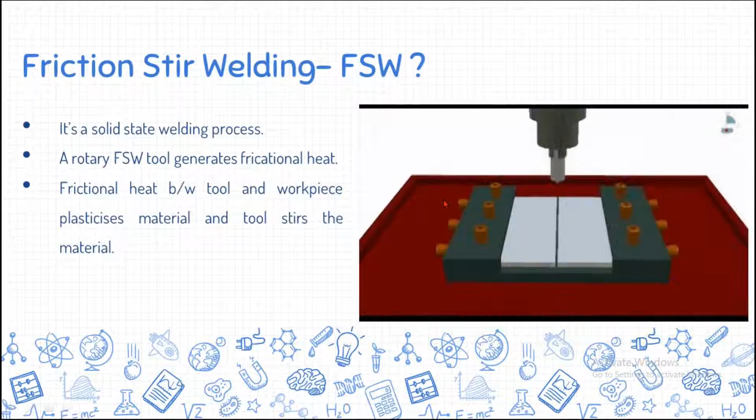So this rotary tool plunges into the workpiece and traverses along the welding line, thereby the heat plasticizes this material, and this stirring rotating action mixes this plate and this plate together, and during solidification, during the cooling time, the welding occurs. That is what happens in this particular process.

For understanding, you can simply categorize this process in 4 steps. The first one is rigidly clamping the workpieces and aligning the tool at the center of the weld line, and plunging the tool into the workpiece is the second step. Once it completely plunges, for around 25 to 30 seconds, until the required heat is generated in the workpiece, we keep it at the same place.

Once the required temperature is produced, we move this tool along the weld line. This is the traversing step, the third step. Once it reaches the end point, tool removal is the fourth step in the friction stir welding process.

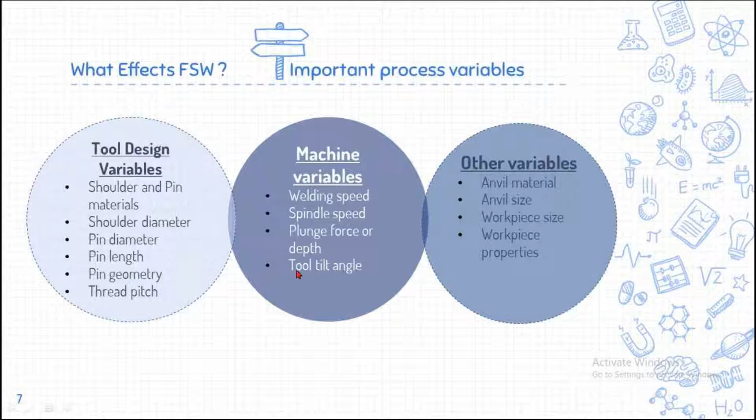And coming to the other variables like anvil material, in practical application we will keep some other material as a backing plate or anvil. That anvil material will absorb some heat from the weld plates. So the anvil material also will influence this process. Size of the anvil or backing plate, workpiece size and thickness will influence this process. Workpiece properties also will greatly influence this process. If one wants to do research on this friction stir welding process, we should thoroughly consider all these process variables in friction stir welding.

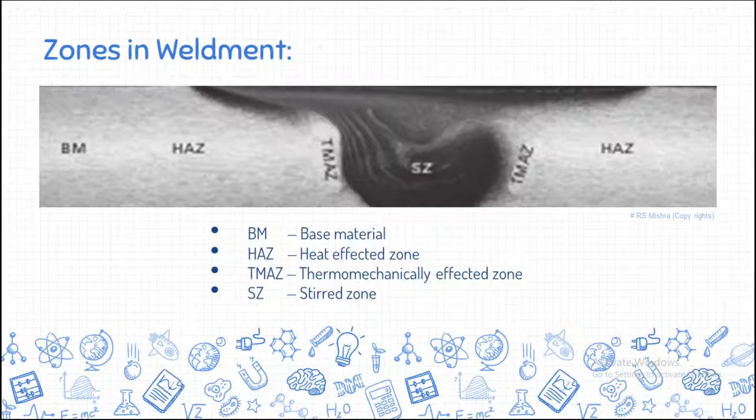Just away from the stir zone, the thermomechanically affected zone. Why is it called that? This area is subjected to both thermal and mechanical effects. That's why it's the thermomechanically affected zone. Somewhat further from the center of the weld, HAZ, that means heat affected zone. Only heat is affecting the material, but no mechanical effect on this particular zone. BM means the base material, nothing influenced here, the unaffected zone. So there are four zones we can categorize in the weldment in friction stir welding.

Coming to the advantages and some disadvantages of this process. We can say friction stir welding is a green welding technique. Unlike conventional welding techniques, it doesn't give any toxic or harmful gases or fumes. So it is a green welding process. One can get good mechanical properties in this weldment, and this process can be easily automated on a simple vertical milling machine or any CNC machine.

In conventional welding techniques, with a consumable tool, we always need to change the electrode every time. But here in FSW, the tool is not consumable. Around hundreds of meters of welding length you can weld using a single tool. That's an advantage of this process. As I told, toxic fumes are absent, and there will be very less distortion, we can say almost zero distortion, and no porosity is observed in the weld zone.

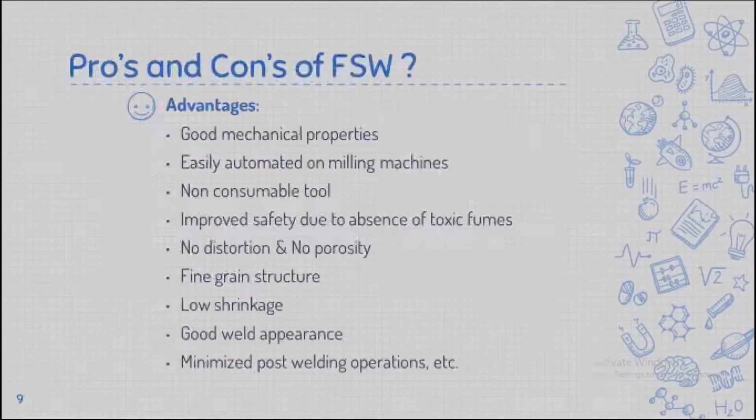But here very minimal post-welding operations are to be done on the weldments. Some disadvantages are also there in the friction stir welding process: when you remove the tool after completion of the weld, there will be a small keyhole left over in the workpiece. That is one disadvantage. And here to hold the workpieces, we need more forces. Clamping is somewhat difficult in this process. We can say it is a disadvantage.

And in some cases tool wear, in some cases tool breakage may take place due to vibration of the machines and other effects. That can be considered a disadvantage. And coming to the applications, this process has been considered in many industrial applications like automotive, shipbuilding and marine industry, aerospace industry, railway industry, and some other engineering industrial sectors.

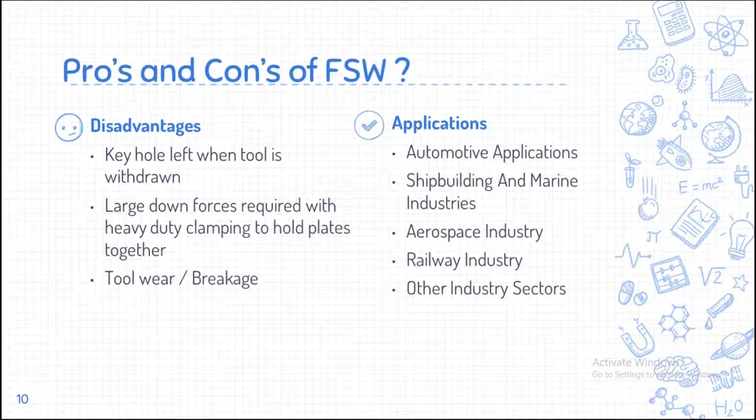Why only friction stir welding? Why not other welding processes? Here, this process is particularly considered for non-ferrous materials like aluminum alloys. These aluminum alloys can also be welded using conventional welding techniques like MIG welding, gas tungsten arc welding or TIG welding. These processes are alternatives to weld these aluminum alloys. But using these conventional welding techniques, the aluminum plates will be melted to weld.

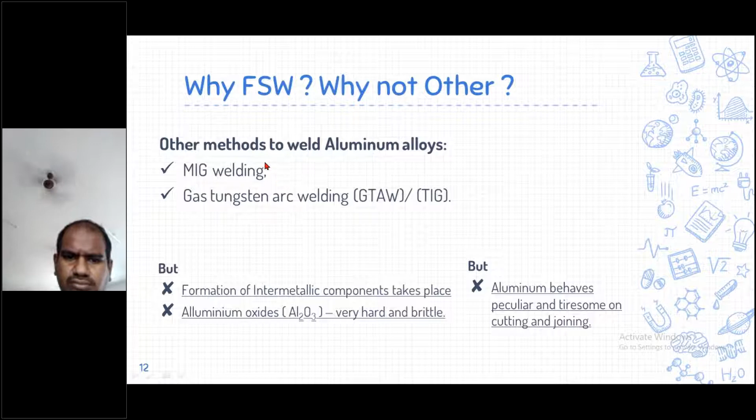These high temperatures and the melting of the aluminum will create oxides, for example aluminum oxide Al2O3 formation takes place using these welding techniques. Al2O3 is a very hard and brittle material. If these oxides form in the center of the weld, when the plate is subjected to forces or loads, it may suddenly fail. So these oxides are not preferable. The aluminum melting point is around 660 degrees centigrade, while the Al2O3 melting point is more than 2000 degrees centigrade. So this is not a good thing in conventional welding techniques.

And aluminum is a typical material which is always subject to oxide formation. So while cutting and joining aluminum, people face some difficulties. All these difficulties, like formation of aluminum oxides or intermetallic compounds using conventional techniques, can be avoided by the friction stir welding process.

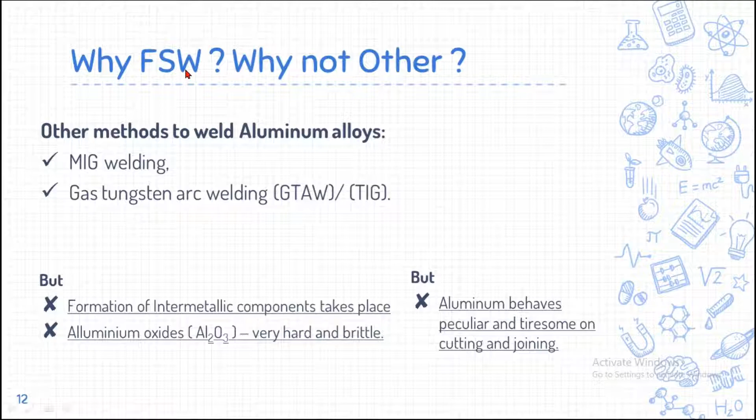Coming to the second topic, simulation. Simulating a process is always preferable in my view. Before doing any experiments, with the help of simulation we can easily find out the various combinations of parameters to weld any particular material or size. For each thickness of plate to be welded, these parameters change. We cannot always go for trial experiments. With simulation, you can change the parameters every time, say from a 3 mm plate to a 6 mm plate, and obtain possible process parameters useful for experiments. So simulation is always the best option before experiments.

In this simulation, we will see two cases: transient thermal analysis of friction stir welding on similar aluminum alloys, and on dissimilar copper to aluminum alloy welding. Before going to the simulation, a point to be remembered: many scientific journals reported that to get a good weld in friction stir welding, one should obtain around 75 to 85 percent of the melting point of that alloy. For example, aluminum melts at 660 degrees centigrade, so one should have a temperature or heat input around 75 percent of that melting point.

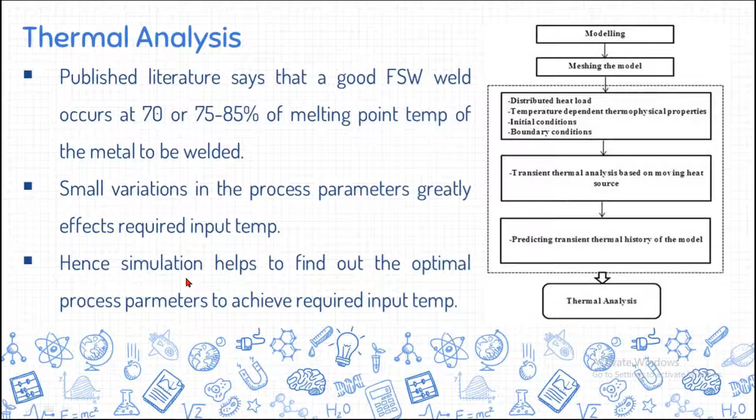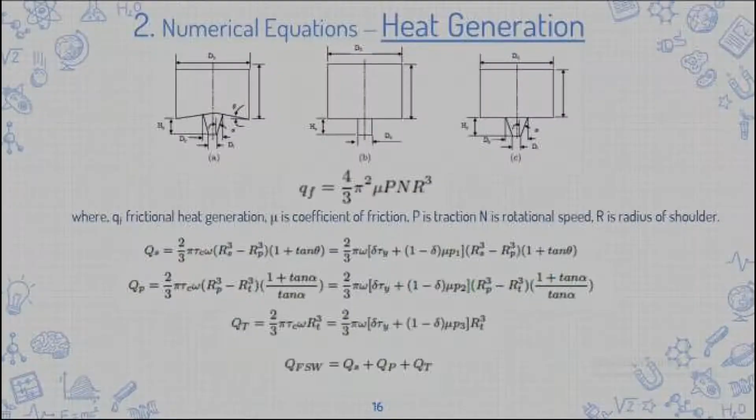For the tool pin, this is the equation, and for the tip of the friction stir welding tool, this is the equation to find the amount of heat generated over these regions. The sum of Qs, Qp, and Qt — shoulder, pin, and tip of the tool pin — will give the total heat generated in the friction stir welding process. These equations should be incorporated in the input value.

Coming to case one, we will discuss three cases in the simulation part: the effect of tool pin geometries — that is, the shape of the tool pin — on friction stir welding; the effect of increasing and decreasing tool shoulder diameter from a thermal point of view; and the effect of plunging force on the friction stir welding process.

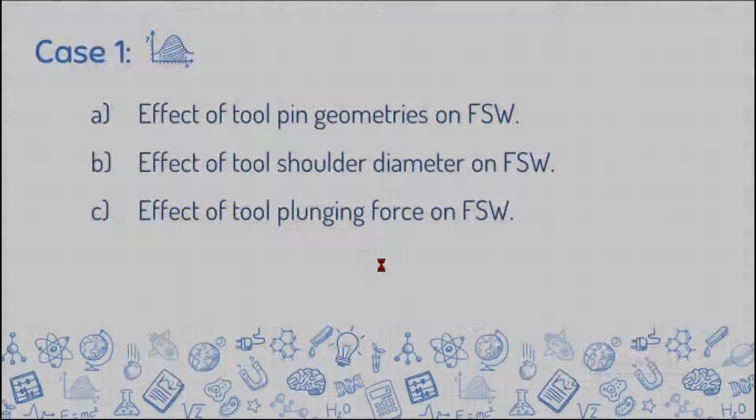Case one, effect of tool pin geometries, meaning the shape of the tool pin. We considered two shapes: a simple cylindrical pin and a tapered pin, with diameter 6 millimeter and length about 5.8 millimeters. We considered these two geometries for generation of heat, keeping properties like rotation speed and welding speed constant. We observed peak temperature distribution for straight cylinder tool and taper cylinder tool around 540 and 528 degrees centigrade. Almost both tools give very close peak temperature when keeping all other parameters constant. This is the effect of tool pin shape on temperature.

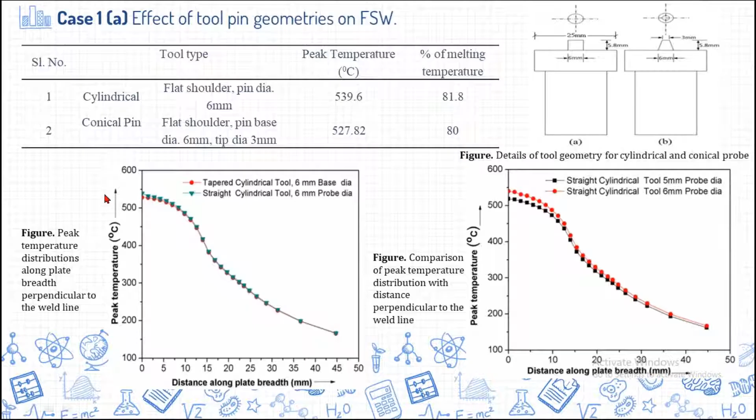Case 2, effect of tool shoulder diameter. We considered from 12 millimeter to 24 millimeter tool shoulder diameter and observed what kind of temperature variations are obtained using this range. For example, 12 millimeter tool shoulder diameter gives maximum temperature at the center of the weld around 399-400 degrees centigrade, and for 24 millimeter shoulder diameter, maximum temperature at the center of welding is around 561 degrees centigrade, which is within 82% of melting point temperature. So for welding 6 millimeter thickness plate, one should have more than 20 millimeter shoulder diameter as the best value for FSW of pure aluminum alloy.

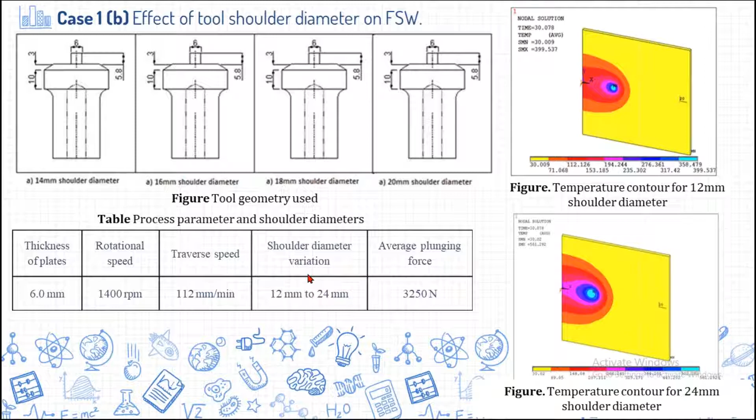We tabulated all these values on graphs, like heat distribution at the center of the welding for 12mm, 14mm, up till 24mm. This shows the maximum temperatures obtained at the center of the welding, and this plot shows temperatures about 16 millimeters away from the center for all the different tool shoulder diameters.

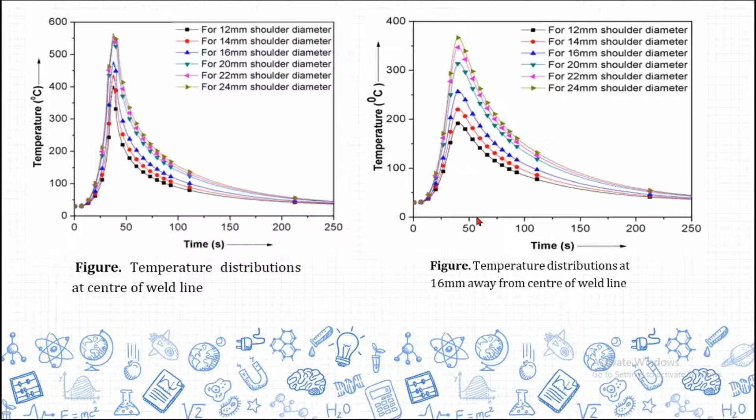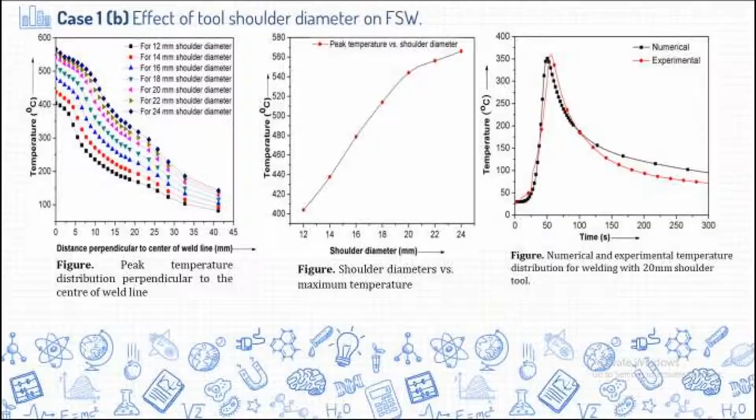The third case: after seeing this peak temperature, we did some experimental comparison with the numerical results. We observed almost less than 5% error between numerical and experimental, very close with the experimental result observed here.

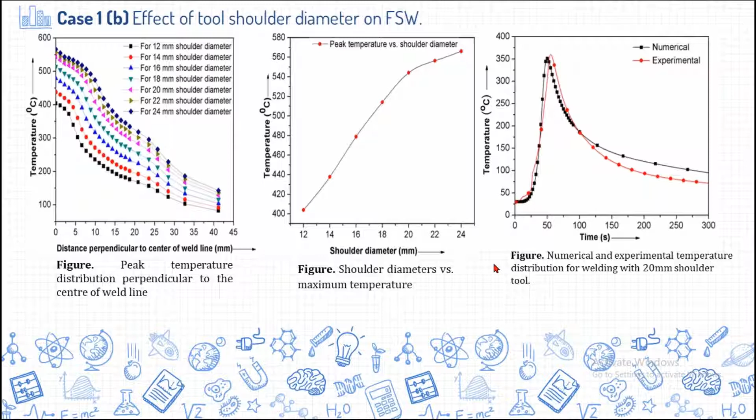The third case is plunging force. We varied from 2000 to 3250 newtons force of the tool on the workpiece and observed what kind of peak temperature variation results.

Hello? Sir, you're audible, sir, you can continue. Okay sir, thank you, there was a pop-up message saying connection is lost.

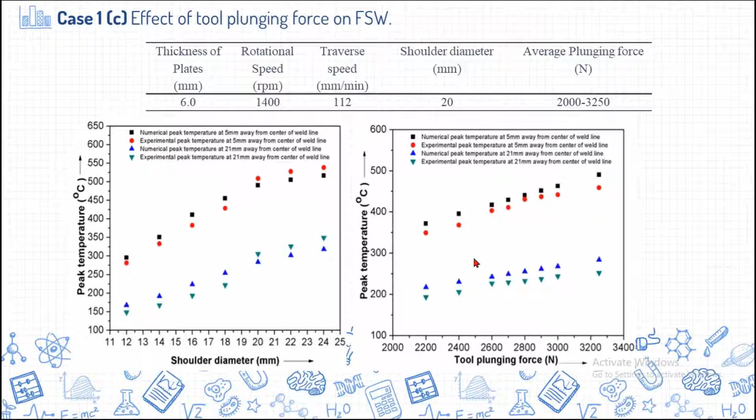So, various plunging forces: by increasing plunging force, we obtain peak temperature around 450 to 500 degrees in this range. With more than 3000 to 4000 Newton force, one can get around 75 to 85 percent of the melting point temperature of that particular plate to be welded.

So in this simulation case study, case one speaks about similar aluminum alloys, but case two, transient thermal analysis of friction stir welding on dissimilar aluminum and copper alloys, will be seen over here.

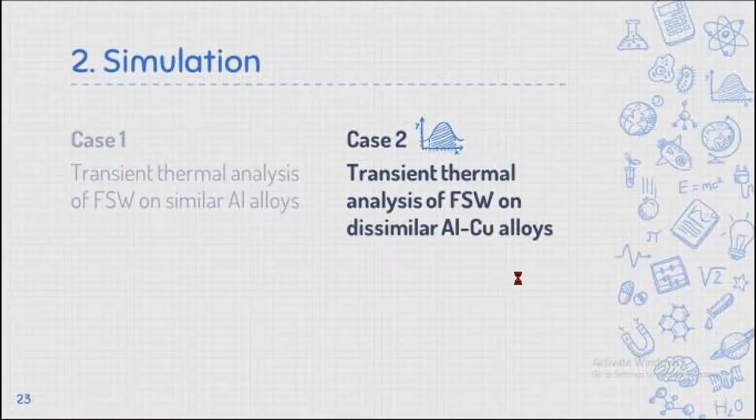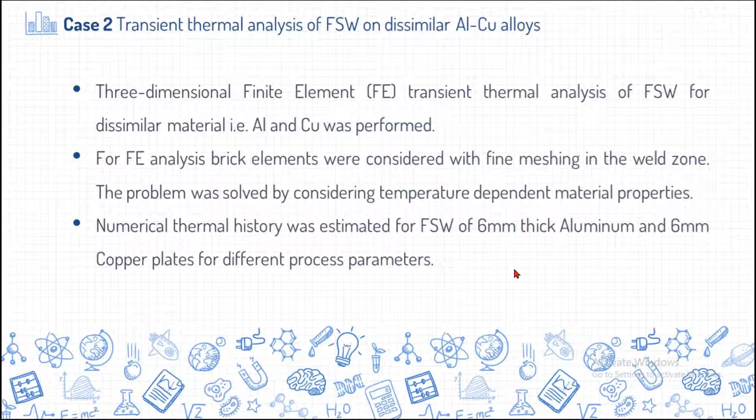Transient thermal analysis, this 3D FE analysis, was performed on dissimilar aluminum and copper, using brick elements with fine meshing at the center of the welding and gradually incremental meshing away from the center. We applied the same technique previously explained for giving initial and final boundary conditions. We followed the same procedure for similar aluminum alloys as well.

So we weld like this in this simulation: the bottom plate is a copper plate and the top plate is an aluminum plate. We kept some offset of the tool, meaning more portion, almost 2/3 of the area of the tool pin, concentrated on the aluminum side, and only 1/3 of the area concentrated on the copper side.

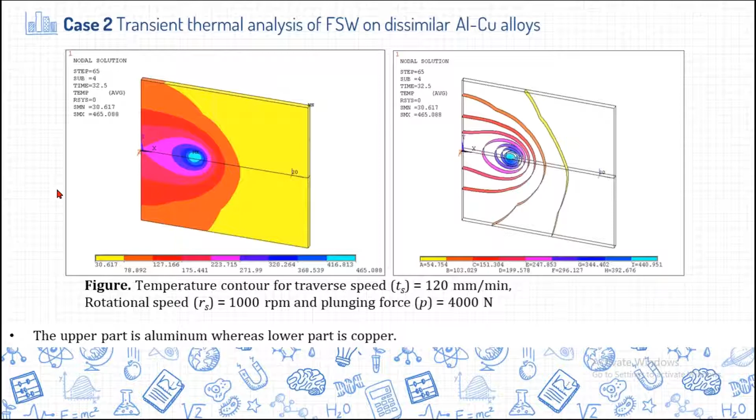We observed the temperature for these process parameters: 120 millimeter per minute welding speed, 4000 Newton plunging force, and 1000 rpm. We got around 465 degrees centigrade, which is within range. This is the thermal contour from the simulation.

This is a simulation from a side view, showing thickness from a thickness point of view, copper side and aluminum side. This much portion is the center of the line. Actually, I need to keep this line out here. This is the center of the line, and this portion is on the copper and the tool pin, and the entire area is on the aluminum side.

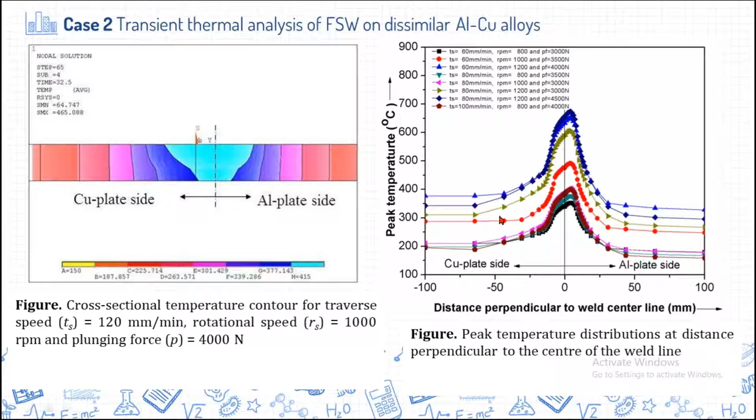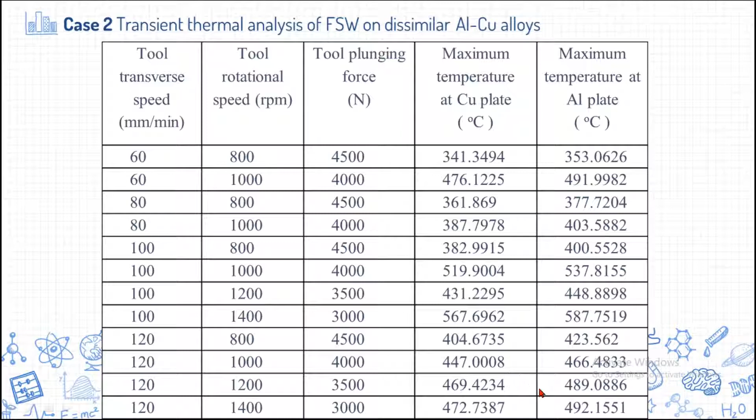Around 415 degrees centigrade was observed. These temperature values from the center to away from the center of the welding were plotted on a graph for all the different process parameters, like 60 mm per minute, 800 rpm, 3000 Newton. We varied all these process parameters and plotted them on a graph. These are the various values for maximum temperature near the copper plate and maximum temperature at the aluminum side, and these are the various process parameters. Around these parameters give a good temperature to get a good quality weld.

The next topic of this presentation is the experimentation of the friction stir welding process. Whatever we observed in the simulation, we tried to replicate with some experiments. Here we will discuss three cases.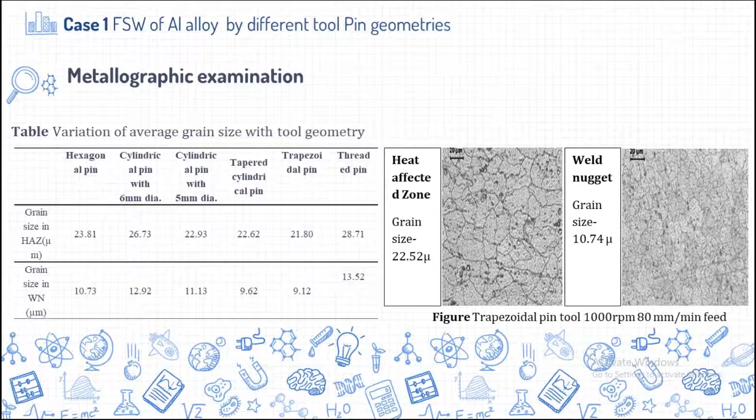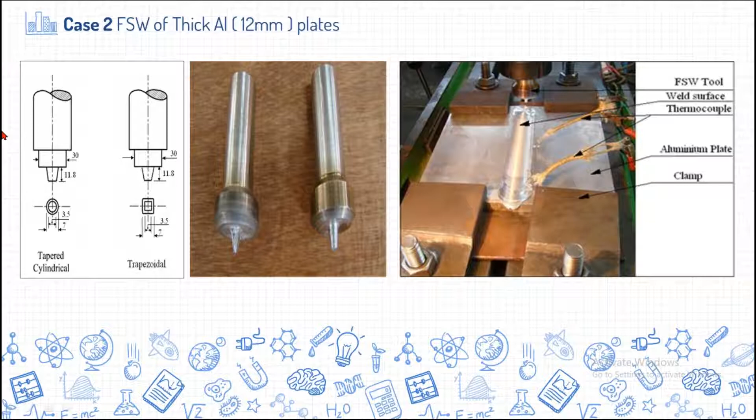So we took around 12 millimeter thick aluminum plates, greater thickness. We tested the same tools: tapered cylindrical, tapered pin, and trapezoidal pin. We fabricated some tools and tested them for high thickness welding plates. This is the setup of the welding plate. We performed welding on these thicker plates here at IIT Kharagpur.

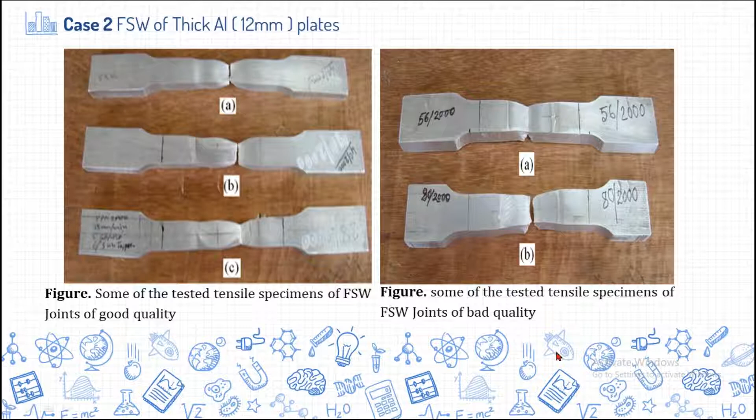And these are the tensile testing samples. Some good welding was obtained - the failure takes place just away from the center of the welding here. So some good quality weld joints, and some bad quality welded joints which failed at the center of the weld zone, for parameters like 56 welding speed and 2000 RPM, and 80 and 2000 RPM. Some bad quality welded joints were observed here.

The same values we plotted in graphs here. If you see these two values, the sky blue and green color graphs are the values for the bad quality welds. The rest show good results. This is the base plate - the stress strain curve is like this, and for the other welded joints, results are almost equivalent to the base plate, as observed here.

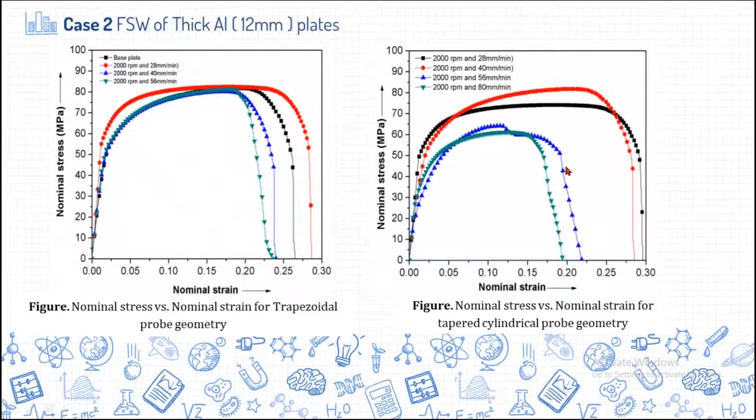So we want to see what happened, what is the reason for this failure at the center. We wanted to see, so we did some microstructural examination using a microscope. Here we observed some defects in the center of the welding over here. We expected this kind of throughout hole is because of improper mixing of material on both the sides, and there is a wormhole

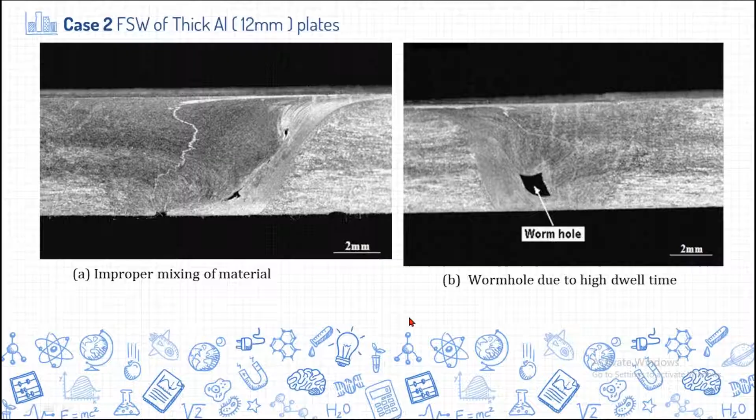defect. Many researchers also reported this kind of wormhole defect in FSW process. The possible reason for the wormhole defect could be the high dwell time; more dwell time is the reason for the wormhole defect over here. And for the same things, we wanted to see the microstructural study, how the grain refinement or grain boundaries change in different weld zones, performed for this high thickness.

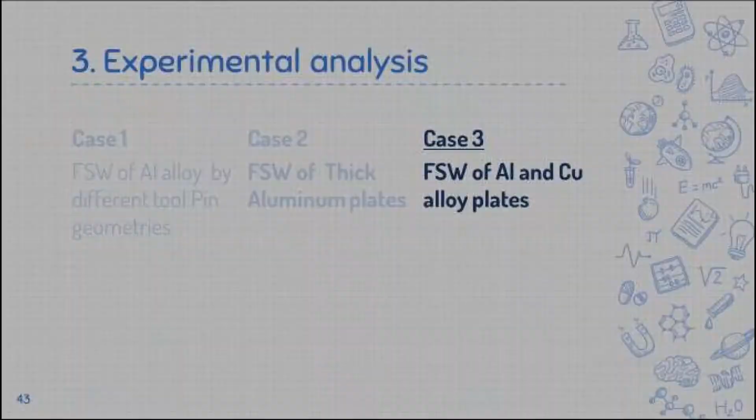The other case, like case 3, friction stir welding of aluminum and copper alloy plates were performed experimentally and compared with the numerical results also. So here in this particular case, we consider two tool geometries. There are threaded tool geometries and the shoulder diameter. We kept a bigger shoulder diameter, around 35 millimeters, and the pin diameter is around 6 millimeters. And this is the left hand thread and the right hand thread tools.

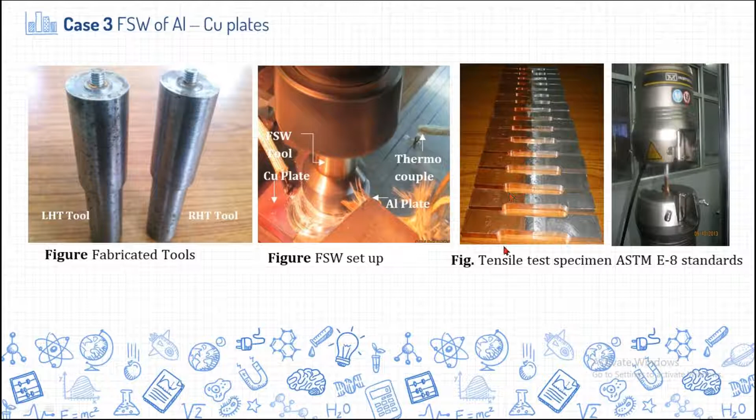So these threaded tools: as this copper material is comparatively harder than this aluminum, we wanted to have a threaded tool so that mixing takes place in a good way, and we conducted the samples. These are the thermocouples. We wanted to record the temperature obtained from the weld plates. So inserting a thermocouple and connecting to the data logger, we recorded the temperature obtained by using this friction stir welding process. These are the various tensile samples after conducting friction stir welding.

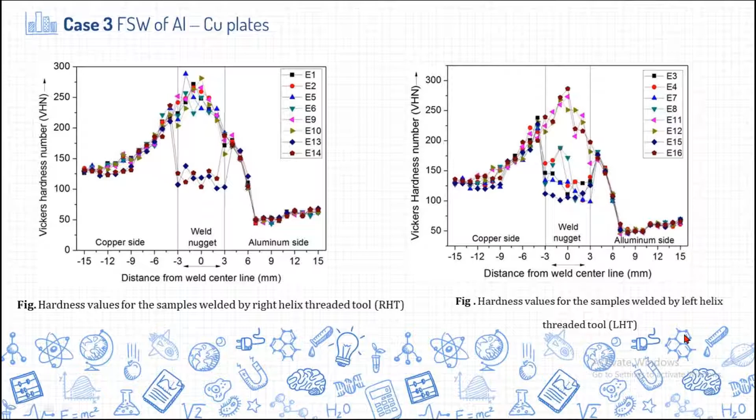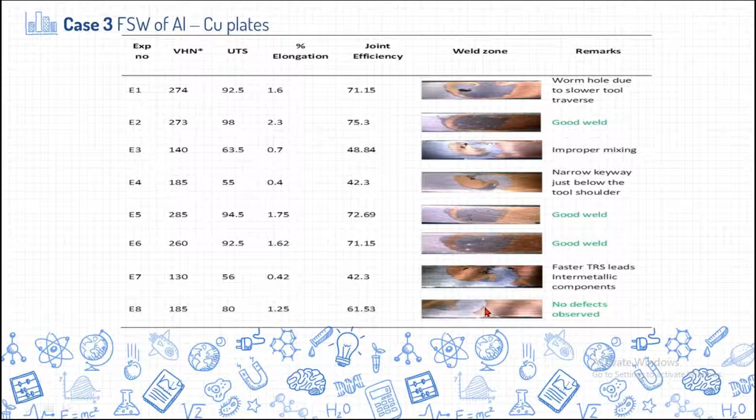We cut the same pieces from the particular experiments and did optical evaluation, like experiment 1. There is a wormhole defect due to slower tool traverse speed, and good welding for experiment number 2 parameters. See, the ultimate tensile strength, UTS, is also good, and good quality welding obtained. Some other defects observed over here, and the tensile strength is also less here. And these are all good weldings and no defects observed over here.

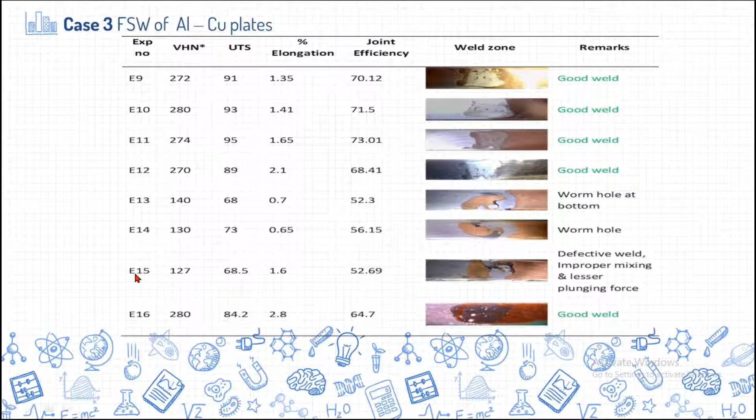For other experiments number 9 to 16, good weld, good weld, good weld. All these are good welds, and if you compare with the strength, strength is also more, and welding also looking somewhat good over here. And we did some metallographic examination for copper and aluminum friction stir weld zone. So different zones: this is a nugget zone, thermomechanically affected zone, heat affected zone, and base materials on both the sides, called aluminum side and copper side.

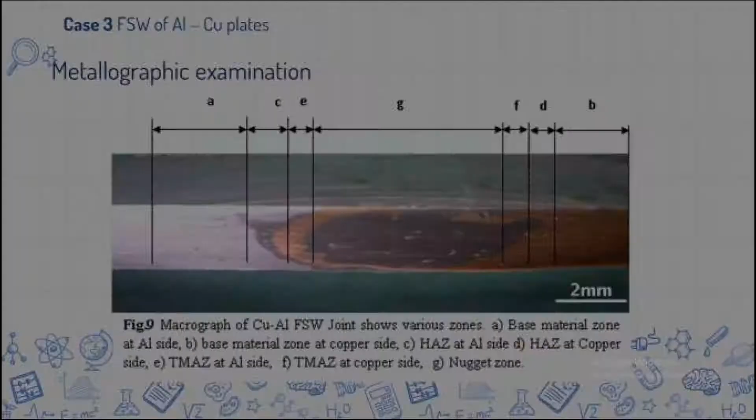And at some portions we observed some pieces of copper transferred towards the aluminum side. We wanted to see what these things are, and it looks like this, and we wanted to confirm whether it is 100% copper or a mixture. It's a mixture of copper and aluminum. We did some further examination using FESEM here.

This is a sample around this region. At this particular region, this is the sample view, and we have selected some elements like aluminum, copper, oxygen, nitrogen, carbon, etc. This is what it is showing. The yellow portion reflects aluminum, and this pink color reflects copper material. So here we cannot identify exactly where the aluminum is.

So we unhighlighted all the things and only selected the aluminum element over here. This yellow portion is completely aluminum, whereas the black portion we don't know what it is. Then in the next step, we unhighlighted the aluminum and only highlighted the copper, which is pink. So then we observed copper is there over here.

So leave aside these portions, and if you observe outside of this one, both aluminum and copper are homogeneously mixed throughout the entire weld zone. But here there is a higher percentage of copper, still some black spots are there. That means maybe some aluminum is also there, but we wanted to see how much percentage of copper and how much percentage of aluminum is at the same places.

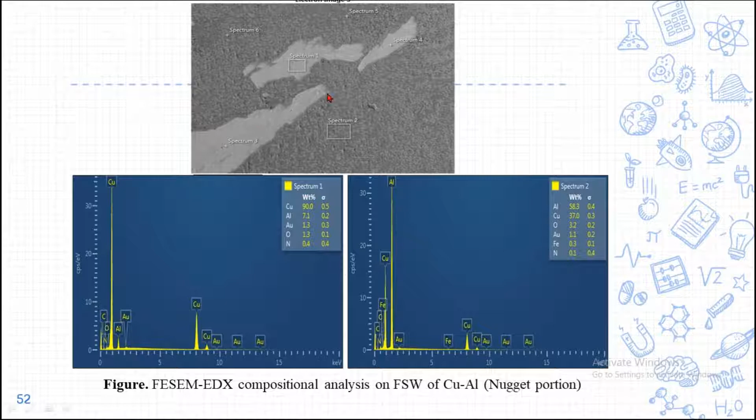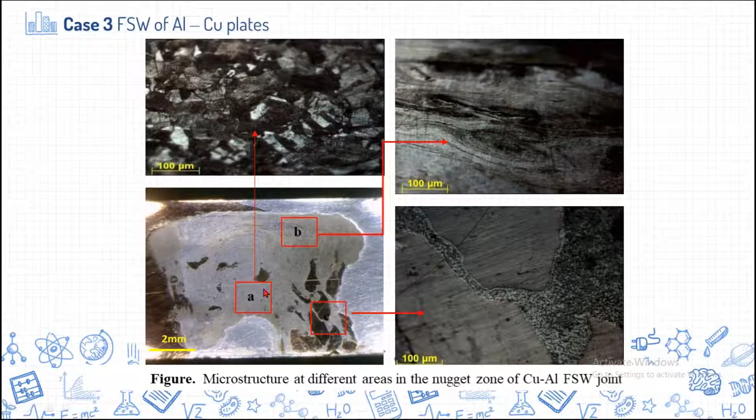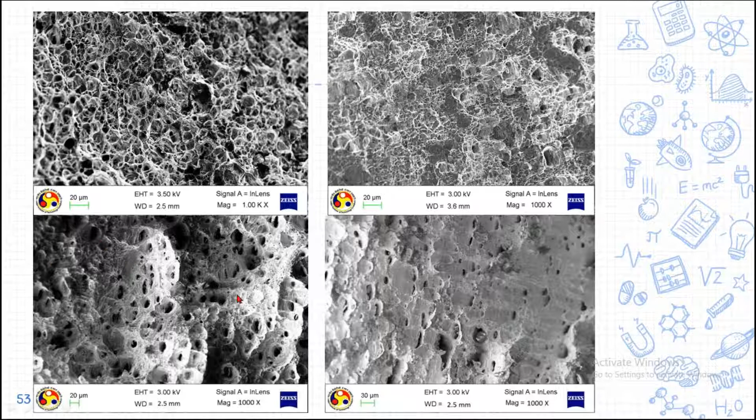This is what we see: though some hard pieces are transferred to the aluminum side, if you neglect these particular parts, in the rest of the area homogeneous mixing of aluminum and copper takes place in this particular study. This kind of study can be performed for different materials by upcoming researchers.

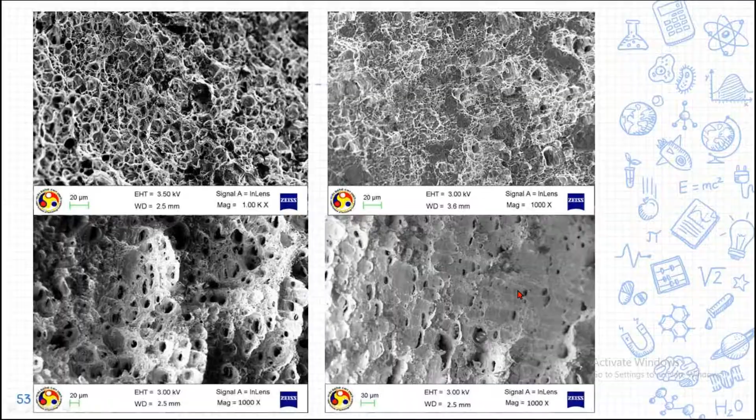This is a fractography study after a tensile test, wherever the failure takes place. This is the pure aluminum fractograph and the copper side fractograph. You see these cavities and peaks and valleys, which show that ductile failure takes place at the weld on the aluminum side, and somewhat brittle failure takes place towards the copper side. And this is about the experimental analysis.

The next topic is research challenges. What other things can be performed by those who want to come and work in this particular area? Some unsolved challenges in friction stir welding. In friction stir, you have other processes like friction stir processing, friction welding, friction stir joining, and friction stir spot welding techniques.

In friction stir welding, very few publications have reported on welding of low carbon steels and mild steels using the friction stir welding process. And friction stir welding of dissimilar thickness sheets, say 5 mm and 6 mm, or 6 mm and 7 mm, also has very few publications reported till now. Maybe these can be taken as challenges.

And tool modifications: what kind of tool is best for welding of steels and other ferrous metals. Tool modification is another challenge in the friction stir welding process. And coming to friction stir spot welding, the tool will not be moved, just like resistance spot welding. In the friction stir spot welding technique, the tool will not be traversed after plunging.

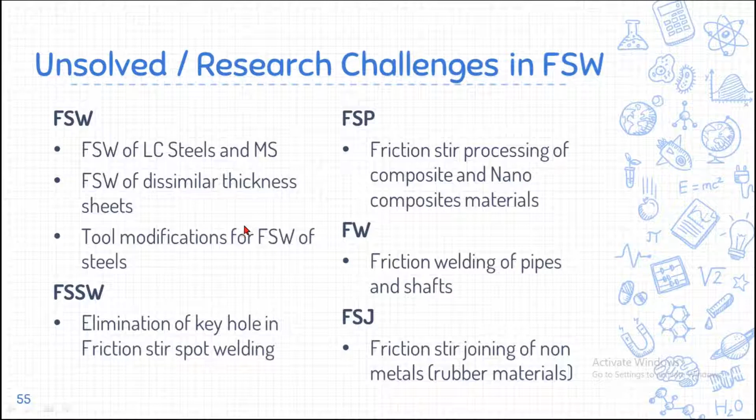Non-metals, whatever we make using 3D printing, can be joined by using friction stir joining process. This is another research challenge, like synthetic materials or rubber materials, like 3D printed materials, can be joined using friction stir joining process. So these are the unsolved research challenges in friction stir application.

If you see, these are the various possible joint geometries that can be done by using friction stir welding process, like butt joint, lap joint, dissimilar thickness, small thickness to high thickness, T joint, corner joint, double-sided butt joint, lap fillet joint. You might be knowing all these types of welded joints, but from the friction stir point of view, only butt joint is reported much compared to all these other types of joints.

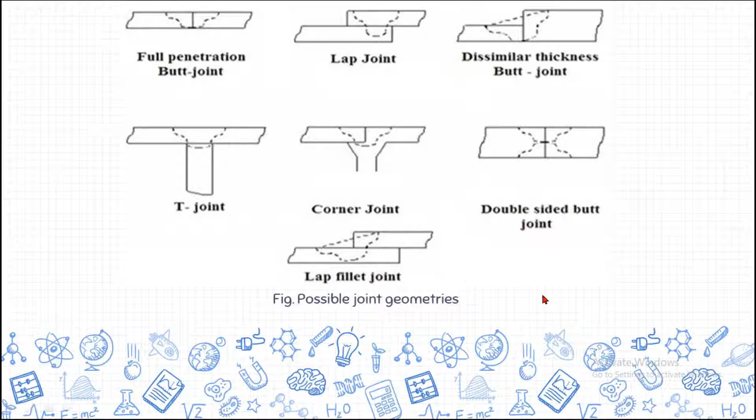Maybe you can select any material, 2000 series or other series of aluminum alloys, and try to do different joint geometries; that will be another research challenge in this particular topic.

Coming to conclusions of this particular talk, we have seen how to do simulation, some experimental methods to conduct similar material friction stir welding, dissimilar material friction stir welding, and other things. Simulating a friction stir welding process is one of the best ways to select process parameters before doing experiments. The simulation helps to find out the process parameters, and it also helps to minimize the cost, the labor power, and the material wastage, etc.

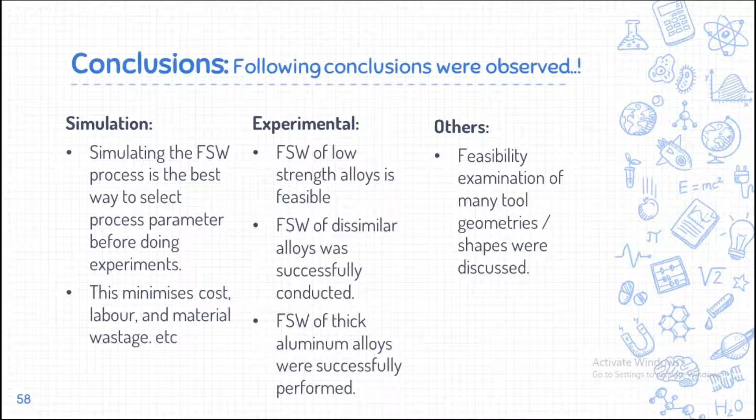Coming to the experimental conclusions, friction stir welding is a very feasible welding technique for low strength aluminum alloys, and friction stir welding of dissimilar alloys was also successfully conducted for copper and aluminum, etc. Here the feasibility of many tool geometries, tool pin shapes were discussed. So from this particular talk, I can conclude these are the areas with these conclusions.

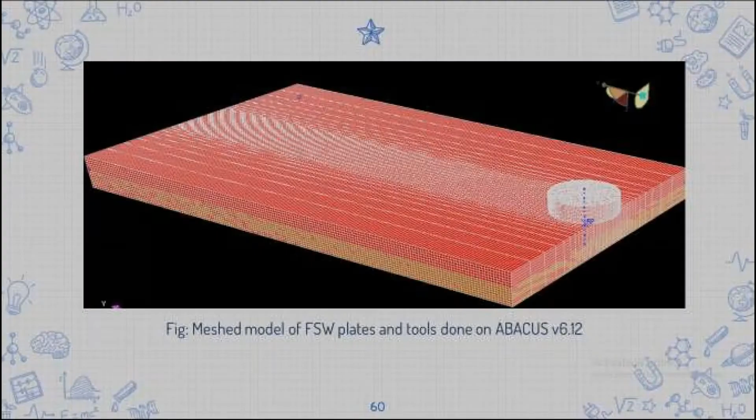Some experimental pictures and simulation pictures can be seen at the end of the presentation. This is the model of our welded plates. Our point of interest is at the center of welding, at the center of the two welded plates. So try to do a fine meshing at the welding zone compared to away. Gradually increasing meshing, like rectangular, brick shape meshing, fine at the center and gradually increasing out from the center line, can be a good method to get good results.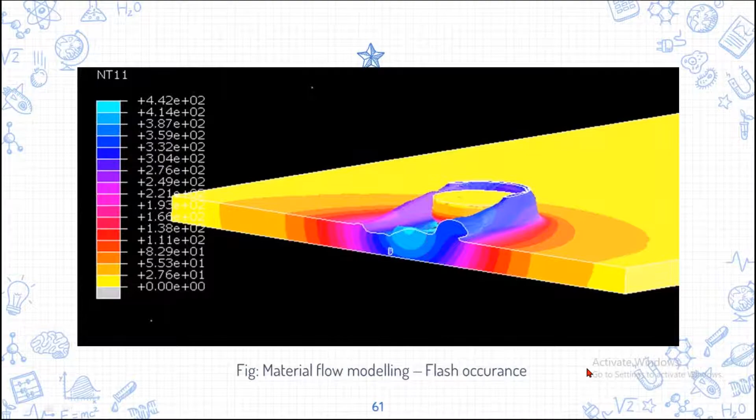At the center of the welding, these are the different temperatures: 442 degrees centigrade at the center of the welding, and these are the various temperatures away from the center. This is the flash formation, conducted using Abaqus software for material flow modeling. If you see this particular picture, some flash is there, and the peak temperature is also comparatively less in this one.

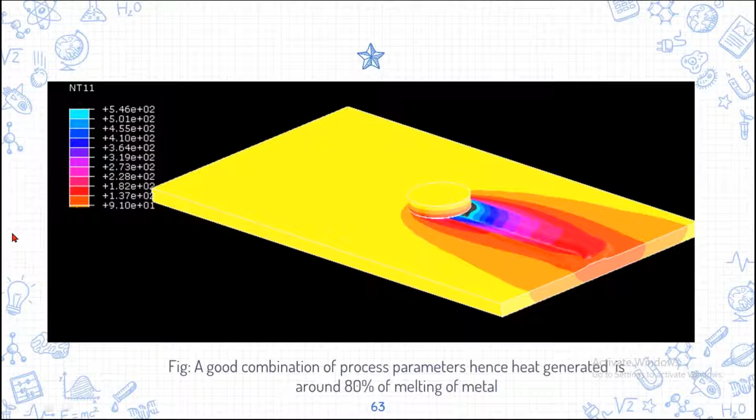Here, a good combination of process parameters is observed, and around 546 degrees centigrade is the maximum temperature, which is optimal, and very little flash coming out of this particular weld line is observed. So I'll show you some simulation video here.

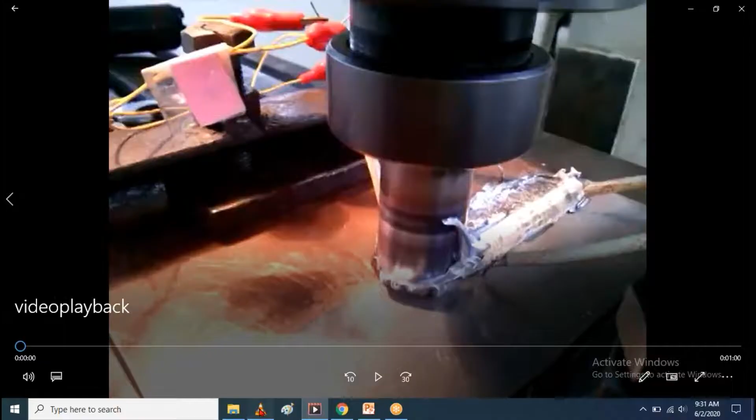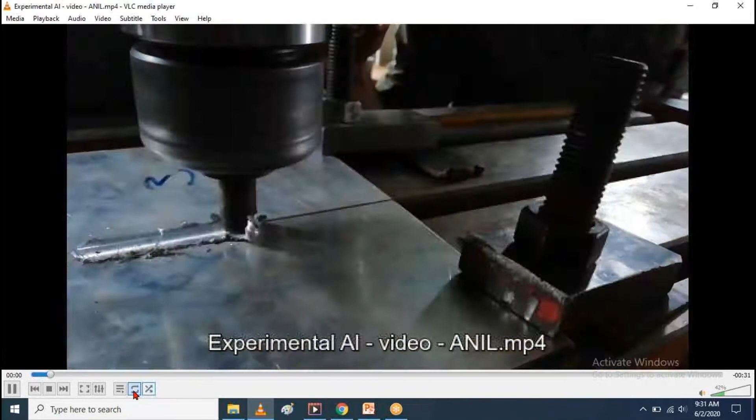So this is the simulation video for our study, and if you see this experimental task we performed, this is how the tool rotates and moves along the center of the weld line. These are the very thin, less than 1 millimeter thick material, like an aluminum flake, coming out, and this is how one can do a friction stir welding process on a simple vertical milling machine.

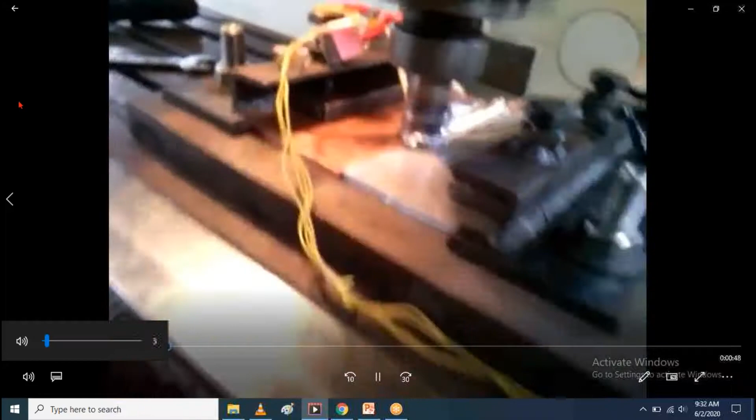And if you see this welding of copper to aluminum, this is the temperature recording with the data logger: for every second, what heat generation takes place. This is the data logger made by Agilent. This experimental heat generation will be compared with the simulation heat we got here. These are the thermocouples attached to the workpiece at different locations, and this is the tool moving.

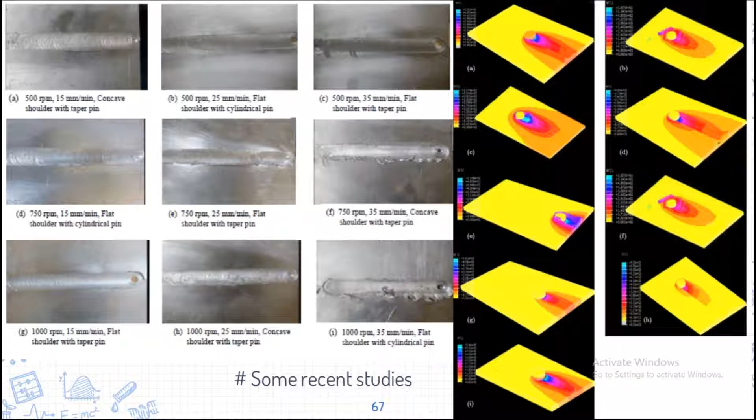Traversing speeds for dissimilar friction stir welding: welding speeds will be comparatively less for friction stir welding of dissimilar metals. So these are some recent studies we performed in recent times, like modeling, material flow modeling, etc.

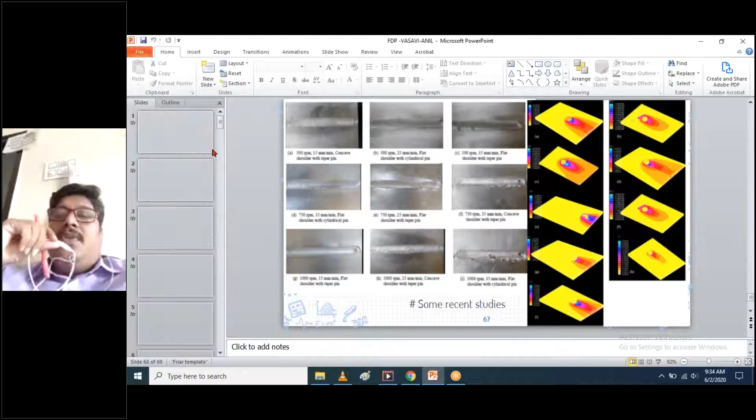So you delivered information about friction stir welding simulation, that is, transient thermal analysis of friction stir welding of similar and dissimilar alloys, different tool pin geometries, and experimentation results, which is all very useful for research scholars. And you also posted the unsolved research challenges in friction stir welding. It's very useful for the participants who are interested to do research in this area.

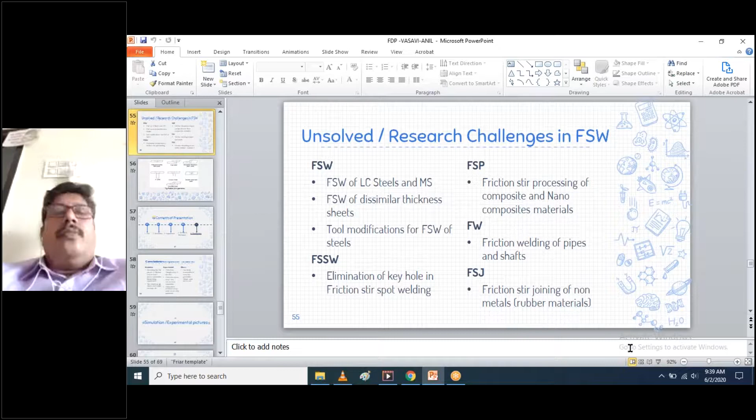Friction stir welding on polymers, is it possible or not? Asked by Partha. Yes, sir. That's what I told as a research challenge. The latest one, friction stir joining of non-metals, is a recent challenge people are working on. Non-metals like rubber material, some synthetic materials. As he said, yes, polymers also, now it is possible, like 3D printing material and other synthetics. You can do friction stir joining in this process, sir.

Another question by Dhruva. In the FSW process used for 1 gram to 6 grams, is all-position welding possible or not? 1 millimeter to 6 millimeter, or grams? I think it is millimeter thickness. 1 millimeter to 6 millimeter. Can we do all types of welding joints? All the joints, right? Yes, sir.

If lesser thickness sheets are there, lap and butt are possible, and even dissimilar thickness. These three types are possible for lesser thickness, but for the T joint the vertical strength is not sufficient. So for lesser thickness, meaning less than 3 millimeters, this is not possible. Above 3 millimeters, these kinds of joints are possible in FSW, sir.

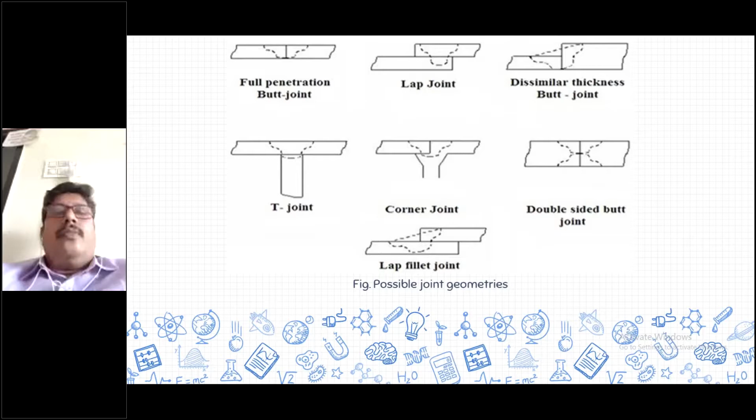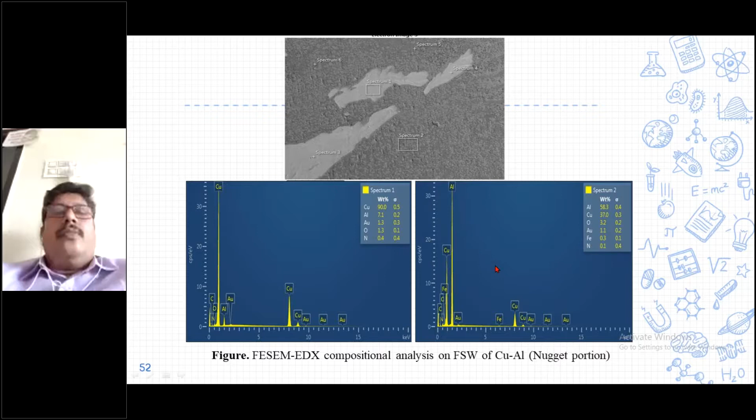Another question from Aravind. What is the tool used to plot or graph the FESEM-EDX compositional analysis? I hope he is asking about this particular plot. Actually, I didn't plot this one. The machine itself gave exactly the same graph, and I used the same, sir. And the best software for plotting is Origin.